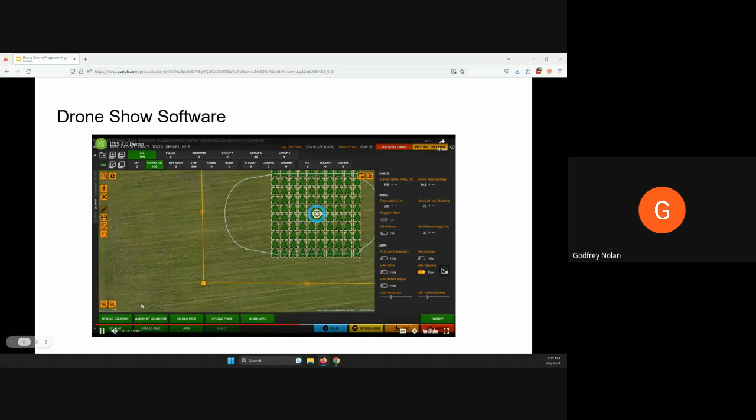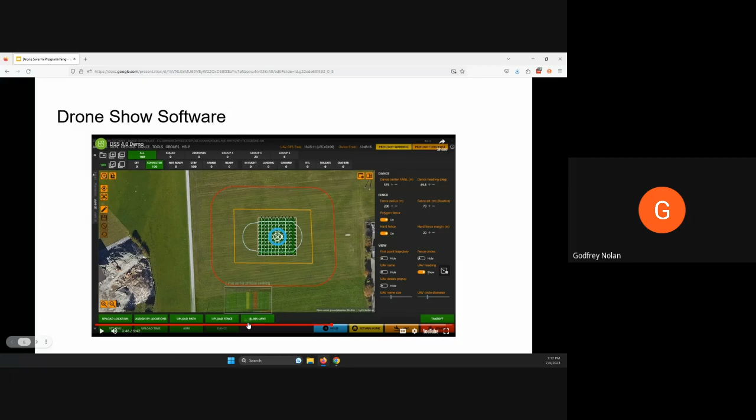So the way this is working is that there's a separate piece of software where you set up whatever the animation is, and then you upload the animation to this. You've got 100 drones. You connect the 100 drones, and it figures out how to do the animation for you. So if we go on a bit further, it shows you how it's done. And they're saying that you really should have two computers, one that's running the drone show software, and the other one that's controlling the drones.

So this is the animation that we have. We just have a drone showing the drones. And here's all the warning stuff you get. But this is how, if, like I said, the local people here, Huntington Woods, said that they wanted to run a show, you're going to use something like this.

Okay, so now for the bad news. This software without the drones is 24,000 to 42,000 euros if you go to the store on DSS, depending on the number of drones. If you have 25 drones, it's 24K. If you have 200 drones, it's 42K. So that's a significant amount of cash. Plus each of the drones themselves would be 1,000 or 1,500. So I don't have that money.

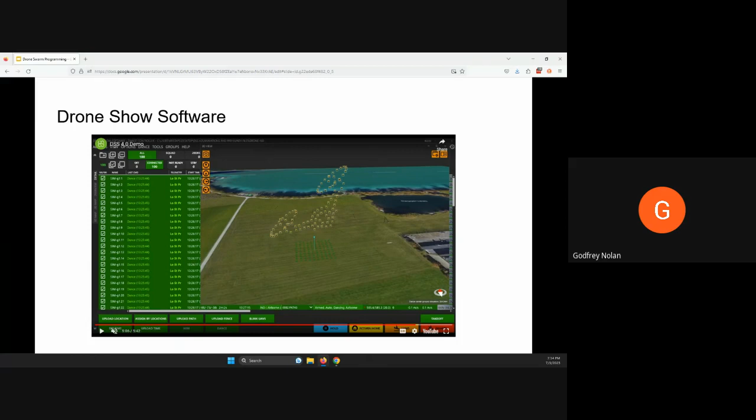They're saying that you need to do 7 shows in order to break even. But there are companies going into this. I am hearing that it's starting to be a bit like the aerial photography stuff that happened in the past, where it's a race to the bottom to see who can do it the cheapest. But I don't have 150K for a complete system, or even 24K to just start playing with the software. And I couldn't find any demo software. So then we've got to find something else.

So what do we do? We're back to this. We're level setting that we're trying to create my little RIIS logo. It's 25 years of RIIS. We wanted to figure out a way to do this. We thought this would be kind of cute. And so we started looking at Mission Planner to see if we could do it through Mission Planner. And you can. It's not to say that I have 25 drones. We have 3 or 4 of them. I'll show you right at the end a very uninspiring drone swarm.

But basically, if you have the kit, the technology is there that you can create what you want to create. It's up to you. The software that's out there makes it a hell of a lot easier, much quicker and probably safer than if you're trying to do it yourself. But there's no reason why we can't do this, and we're basically doing the poor man's swarming to get my little logo. It's nowhere near as graceful, but it's a lot cheaper. I'm not hearing that anything is much cheaper than the DSS. If anybody knows otherwise, I'd be more than happy to hear.

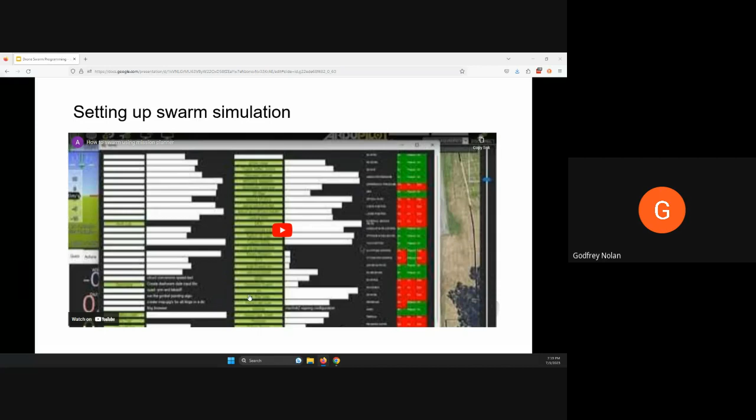Okay, so like I said, I'm going to walk you through how to do this, so if you've got Mission Planner, it's missionplanner.com, just download it yourself, and we'll walk through what we need to do. So we open the Mission Planner software. In the top menu, we click on Simulation. We're going to select the Copter Swarm multi-link. How many do we want?

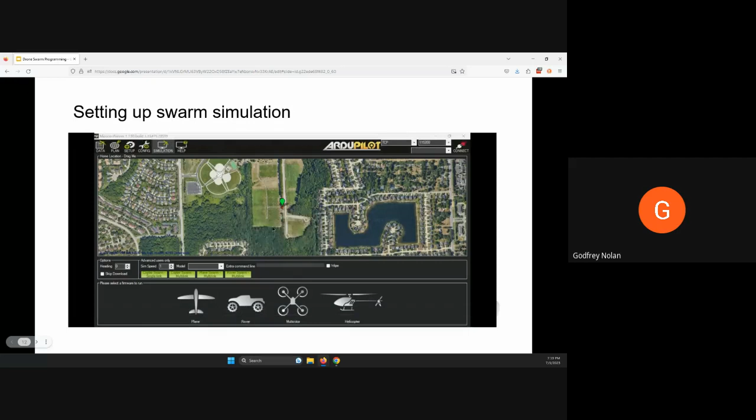In this case, I'm just picking 3, but you can pick as many as you like. I will say that if you do more than 20, you want to make sure that you have a super fast computer, because you need certainly an i7 or an i9, or a good Apple M2 chip to get this working. Mission Planner I was definitely using on Windows. I'm not 100% sure if it's on other platforms. So once the drones are visible, basically what we want to do is set some of the...

So here's our 3 drones here. So we have them now, and then we're just going to zoom in. So they're just all sitting together. We want to do a bit of a configuration on them first. One of the things that we found is that it's good to set the WP nav speed to 200. And the reason you want to do that is because it's slow enough that the drone doesn't fly so fast that it destroys the pattern. So whatever pattern you're trying to make, it's good to keep the speed about 200.

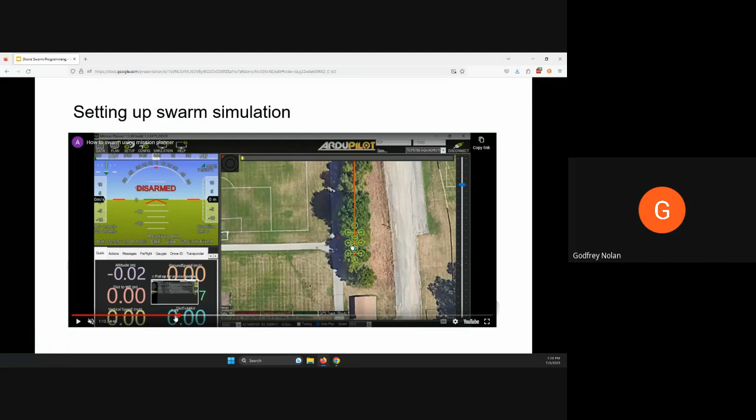If you leave it as 1,000, which is the default, then you're going to find that it's going to be flying too fast. And you got to switch between the different drones, click on the drones, and then make sure that they're writing what they're supposed to be writing. So a lot of the time, what you want to do is make sure that the parameters are correct, are this 200 for each of the different things. You might want to look at other things as well if you want to change some of the other parameters, but that was the most basic thing that we need to do. Okay, next.

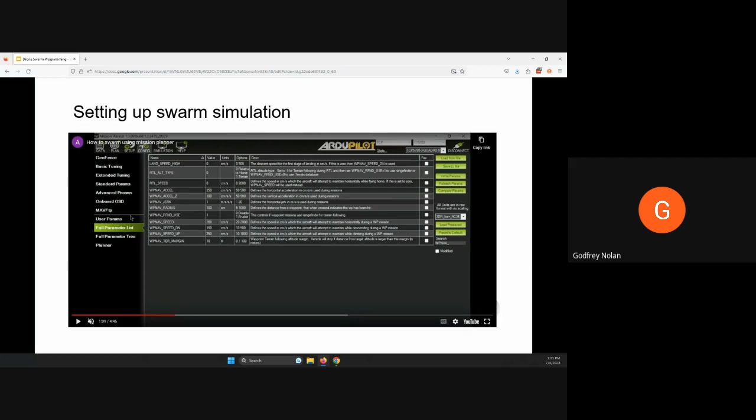So we set up the swarm simulation. Now what we want to do is we want to run the simulation software.

I need to fast forward this a bit. I was having a bit of a problem with this earlier on. Wasn't taking my times. Okay.

Okay, so you'll see here that when you hit Control F, which opens the advanced menu, all of the things are here. Mission Planner is just amazing, the amount of things it has. But over here we have Swarm. If you click on that, basically what it's going to tell you is it's in beta. So we are in beta, but hey, I'll use everything rather than having to pay 40 grand for some software. So off we go.

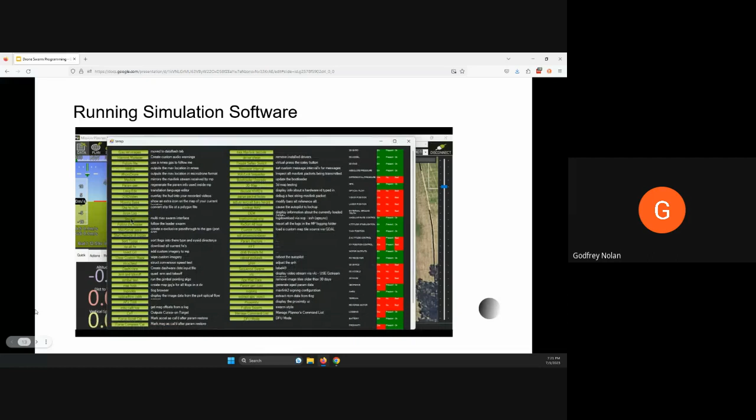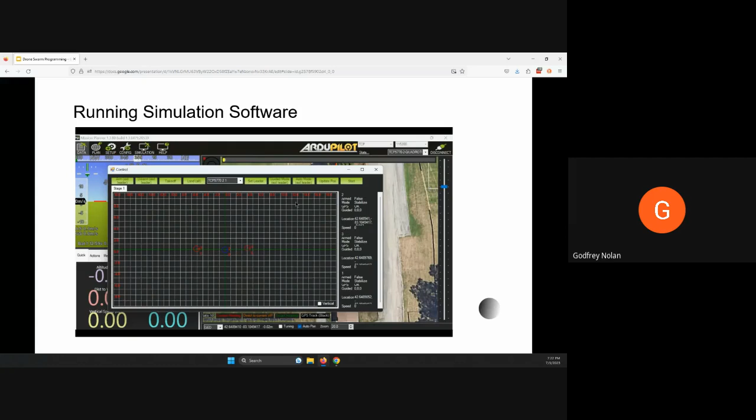So this is the Swarm menu. So now what we have here is a grid with buttons on the top, and we have all the drones in the middle. They're all kind of on top of each other, so you got to make sure that you separate them out. The one that's blue, you're going to make sure that it is the one that is set to the leader. Okay, so once the leader is assigned, its location can be changed. And we keep the Swarm tab open to avoid restarting the process.

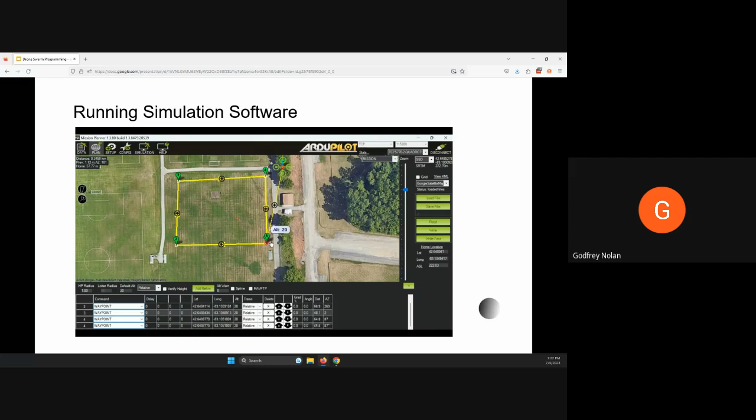Now what we're doing here is we're putting our waypoints. All we're doing is just a really simple waypoint. We're going to write that out to the drones. I don't want to go to data yet. Hold on, wait a second there. Just make sure I covered everything. Okay. So let's go back over this again because I talked a lot there.

We opened the advanced menu, hit Swarm. So in the Swarm menu, there is a grid with buttons, and we have all the drones in the middle of the grid. They're all on top of each other, so you basically got to separate them out. We've got 3 here, but you can imagine if you get more in there, you want to make sure that you're separating them all out so you can see them in a pattern. And then you want to set the leader. So in this case, we're just going to have a follow the leader.

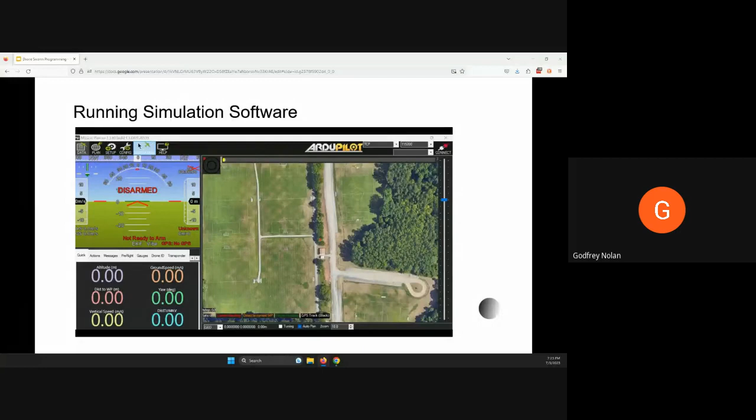I'm going to switch back to the Mission Planner window, and then we're going to click on the Plan tab. And once you're in the Plan tab, basically what we can do is start setting up our waypoints, which is what we were doing there, so that we can get it to start. Okay, so once we've got our waypoints done, now what we want to do is have our flying swarm. So yet again, I have to push this out here. Hold on.

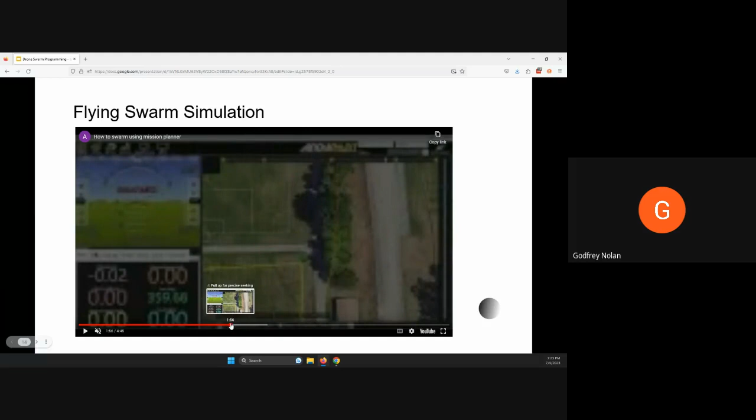Okay, so how do we get it to actually fly? So a couple of things we need to do. Once the mission has been created for the leader, ensure that you're on the Mission Planner screen, which is where we are. So we're going to be on the Data tab. Under the flight display screen, we got to locate the tab and click the Action tab. Get rid of this. So this is our Action tab, which is this one here. And then we get all sorts of buttons in here, and we want to click on Arm/Disarm to arm the drone. Arm/Disarm here.

And you want to pretty quickly go over to the other side of the screen and click Takeoff. You've got about 3 or 4 seconds before the drone disarms itself. So basically it's showing that it's armed here, but if you don't do takeoff, it's going to disarm pretty quick. So on the flight display screen, we observe the drone starting to move. Then let's go back. Let's just continue.

Okay. Okay, I'm going to return to the Mission Planner window and click auto in the action tab to start the mission on the leader drone. And then you can see basically that the other drones are armed. So yeah, actually, hold on a second, I missed a step.

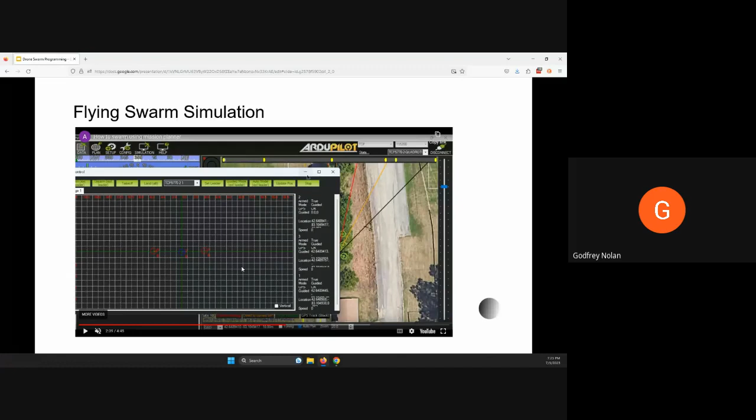So we go back to the swarm window, which is what we have here. We click on the Arm Excl Leader, which is up here, which is to arm the followers. And if everything's working correctly, the armed icon on the right-hand side will turn to true. Then after arming the following drones, we click on takeoff, wait a couple more seconds, and then everything should start flying. And you can see now that they're all flying together.

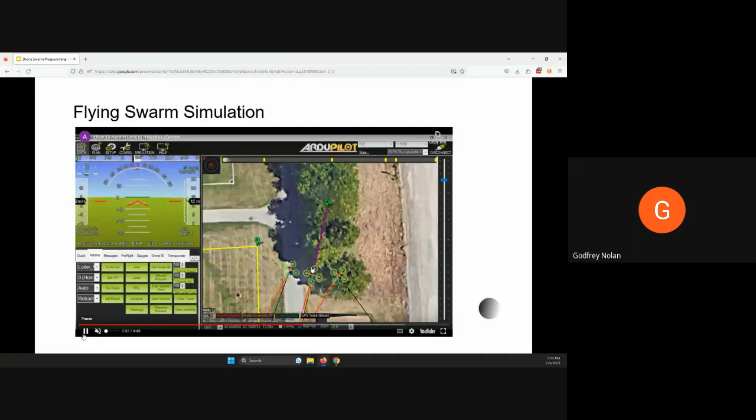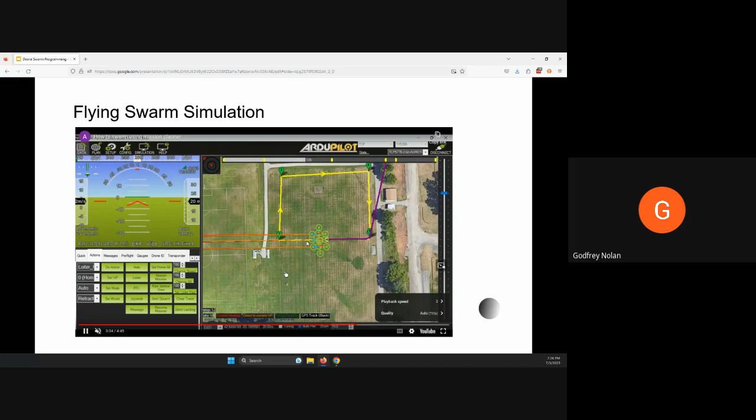And it goes to follow the waypoint pattern that we've done. Again, I'd say it's a hell of a lot easier to upload the animation. It does it for you, but we are technically doing a swarm, even if it's only 3. Okay, speed it up a bit. You get the general idea. Okay.

Also, if you have the swarm window up, you can change the formation of the drones while they're in air. So you can basically choose whichever drone you want and then start moving them around. And by doing this, basically, that was how we got the RIIS logo to work together. And then you can also group them together, to make sure that you're getting whatever pattern you're trying to do.

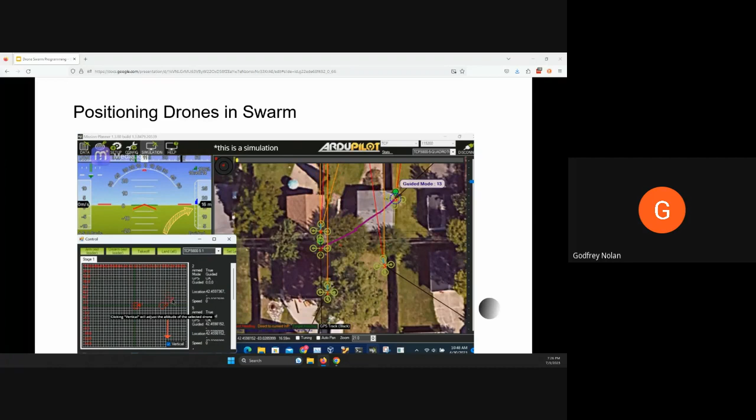Okay, what's next? I'll talk a little bit about troubleshooting. Okay, so in the simulator, it's not a big deal. Basically, we're not flying the drones. We're using fake drones within Mission Planner. If you are flying the drones, be very careful because those buttons are really close together. And given how close the disconnect button is to the drone selector, it's important that when you're navigating the controls that you don't, by mistake, press the disconnection. And if you do, you're going to have to restart the entire process.

And then because this is still beta, occasionally due to some glitches, it may not function as intended. But if you do follow the steps and get used to following the steps, pretty quickly you'll get up and running and be able to design your own patterns. And then if you do encounter any unexpected behavior or performance issues, you just restart the swarm window and it'll get you going again.

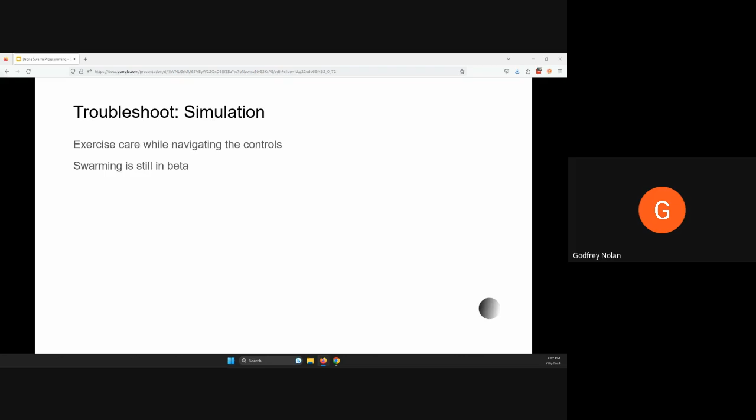What else? So there are multiple ways to connect the drones to Mission Planner. In our case, we're using the Holybro telemetry radio. So each of the drones that we're flying has this. We're pairing the radio. So when connecting more than one drone, make sure that the net ID is different for each pair of radios. This can be changed if you go to Setup, Optional Hardware, and then choose the SiK radio. And so once connected to each other, take one radio from each drone and connect them to the Mission Planner. That works pretty well.

Okay, so we're now getting into the stage where we've connected the drones, we've got our mission working. Admittedly, it's only within the Mission Planner. It's not actually real drones. So what do we have to do to get this to work for when we fly the drones? Okay, so it's not actually that different from what we've done so far. It's basically a lot of the same steps.

We connect all the drones to Mission Planner by right-clicking on the menu bar and selecting connection options. So we've got the videos here to show you what it's done. Once all the drones are connected to Mission Planner, they should show up in the map. So this is our map here, our swarm map. And then clicking on the down menu will allow you to choose which connected drone to view.

And then if you click on Control F again, that's going to pull up the advanced tool menu. Click on swarm, and then a red circle will appear for each drone that's connected. And then you select a drone to be the leader by clicking on the drop-down menu in the middle of the menu bar over here. And the selected drone will turn blue to indicate the leader.

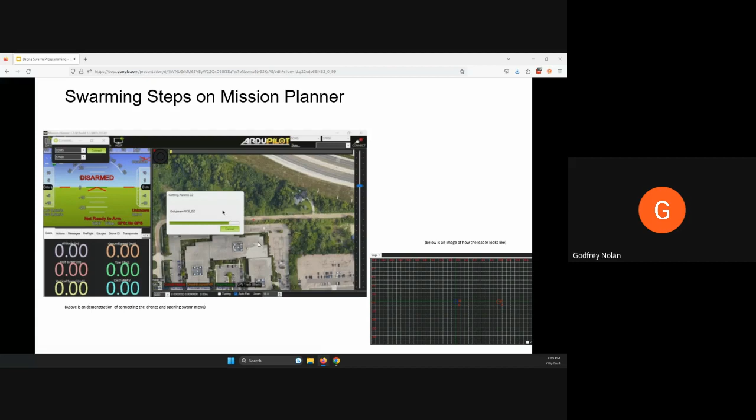Okay. So in order to fly the swarm manually with a remote controller, go through the previous steps. Arm the follower drones like we did within the simulation by clicking Arm, Exclude Leader. Arm the leader drone via a remote controller and take off from the ground. So you fly the leader drone to the desired altitude and set it in position hold in the remote controller.

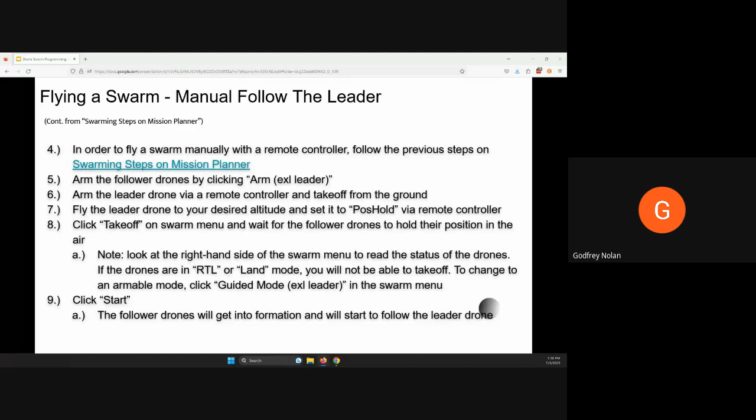Click Take Off on the swarm menu and wait for the follower drones to hold their position in the air. So basically they'll just go up in the air and get ready to go. And then if you click Start, then it's going to follow the pattern that you've defined for the leader drone.

And then what else can we do? We can also do autonomous swarming, which in this case is pretty similar to what we had before, but we're just going to define a pattern that we're going to follow. So it's not going to be the follow the leader. It's what we have here. So connect all the drones to Mission Planner by clicking again on the connection options. You can see there's a lot of repetition here.

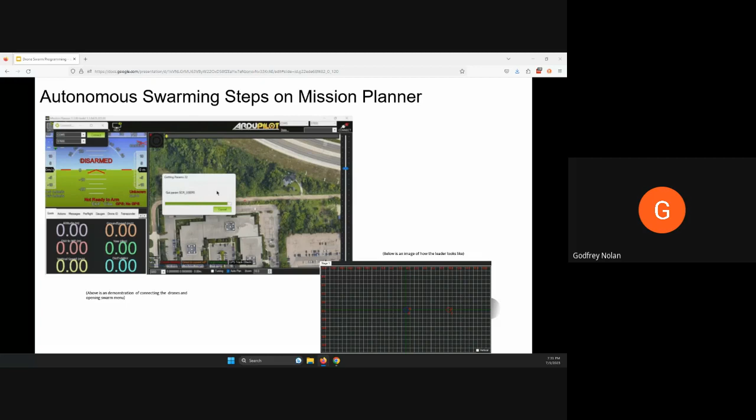Control F onto the advanced tools to get the swarm, the advanced menus to come up. Click on swarm. Again, you get the 3 circles, which are going to be the drones. So you have to separate them out. And then a red circle will appear for each drone that's connected. Select a drone to be the leader by clicking on the drop-down menu in the middle of the menu bar and select leader again.

Okay, so how do we fly that? Select the leader drone from the drop-down menu, create a flight path on the map by left-clicking to plot waypoints. That's what we did earlier on when we were setting up all the different waypoints. It's recommended to enable the geofence under the config tab and create a fence around your flight path to reduce the risk of the drones flying out of range.

We had lots of examples, especially when we were starting to do this, where the drones would just fly off for no reason. So make sure that you put a geofence in there. Also, if you've got anybody who's watching it, you want to make sure you're taking their safety into account. So if you've got a geofence, just make sure it stays within whatever field that you're working in.

Click write to save the path to the drone. A lot of the times when we have to rewrite it, we delete them all and then we click read just to make sure that they've actually been saved. So when the leader drone is selected, navigate to the data tab, and click arm/disarm again. Take off with the leader drone by right-clicking the map and selecting take off.

And then in the swarm menu, click arm, excluding leader. And then in the data tab, set the leader drone to auto mode. And so in this case, basically it's going to take off on its own. So then the swarm will follow the path until they reach the last waypoint.

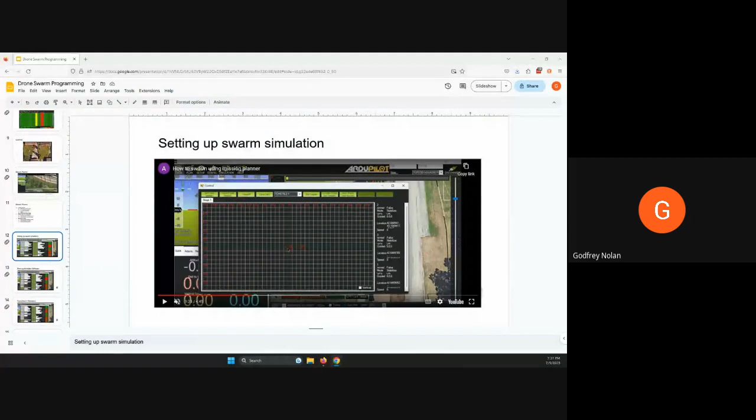So what we have here, and I wanted to show everybody else as well: all of the stuff that I was talking about is in here. So if you want to follow this yourself and set up a swarm simulation, I've broken out the steps that you need to take. However, Brian, to answer your specific question, this is the swarm mission screen, okay?

Within that, we have 3 drones, and that is the one which is the takeoff drone. So we know where that is, whether it's virtual on our swarm simulation or whether it's actual, because we defined it as the leader when we fly it manually or if we fly it auto. And then this is where you can barely see the other 2 red drones on either side of this. That is the distance. You define what the distance is.

So basically you drag and drop it to whatever you want. If you want it really close, you drag it closer. If you want it over this way, you drag it further away. You can make it in a circle. You can make it in a square. It's entirely up to you to define how far away they are and in what pattern they are. And then they keep that configuration? Yeah, because they follow the leader.

So here it's just a straight line. But if you have it in a square or rectangle, and then you tell the leader to follow the waypoints, which is that yellow square that I drew, so you tell it to go in whatever direction, the other drones will follow it in that pattern. Great. Yeah, that clarifies it. Thank you. No worries. Anybody else?